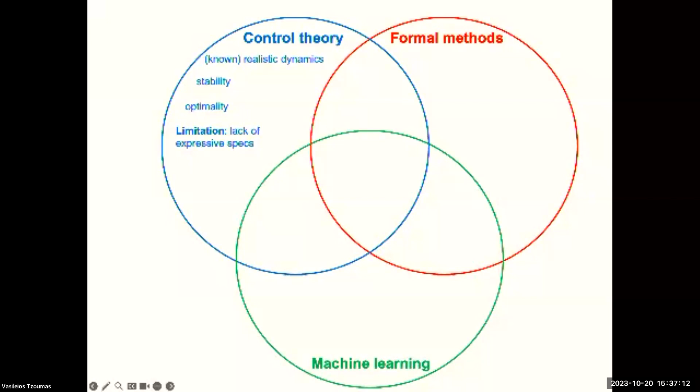However, in formal methods, we have expressive formal specification languages. In formal methods, which is an area in computer science, you can more or less formally express whatever you can say in plain English, in natural language. Here's a very simple example from robotics. Think of a very simple robotic environment where the environment is partitioned, and you have a robot that can move from some base, and it can gather data from some region. It has to avoid the dangerous region. It has two recharge stations. There are some intersections in there. I can literally write down a specification like that, and I can easily formalize it in some logic.

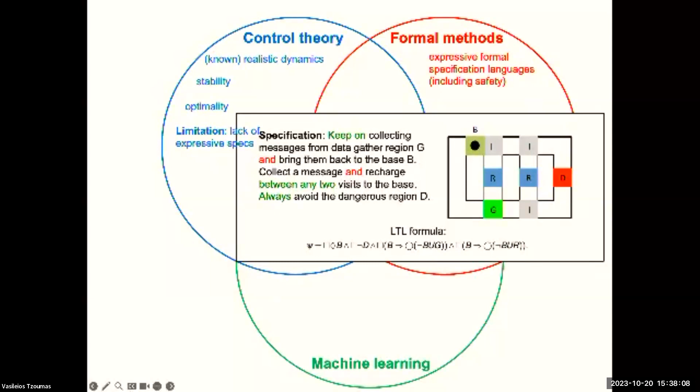This particular logic is called LTL, linear temporal logic. Most of you recognize here, I guess, the Boolean operators: conjunction, negation, implication. These weird symbols are temporal operators. So we can actually reason about how the truth value of statements change over time, right? So we have this rich specification language.

We also have algorithmic computational approaches for verification and synthesis. That particular logic that I showed you before, LTL, has the property that I can take a formula and generate an automaton which accepts exactly the language that satisfies the formula. Think of some FSA, or a more sophisticated one, like a Buchi automaton or Rabin automaton. And if this is your system, if you have a finite state system describing the behavior of some computer program, there is a well-defined notion of compositionality between these two. You can map a verification or synthesis problem for a very simple system like this, from a very rich specification, to some game on a graph. And this problem is very well understood. We had some discussion today that this problem is very well understood, but it's also extremely expensive. But at least we understand how to do this.

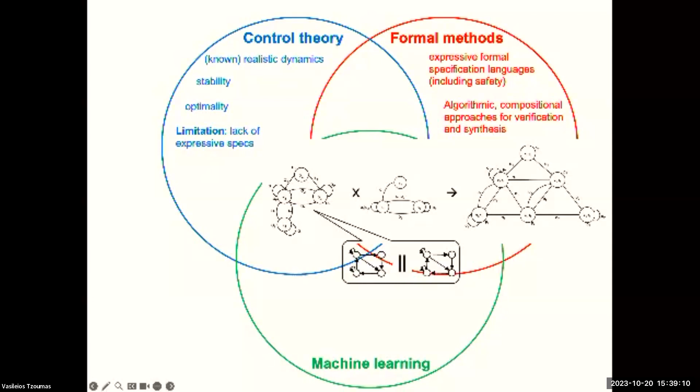And also, what we have in formal methods, we have formal ways of composing systems. So my plant doesn't necessarily have to be one system, but can be the composition of several agents interacting with each other. We know how to compose them. So that's what's nice about formal methods.

The limitation, again, traditionally at least, is that it was made to be interpreted over finite state systems. Think of writing down a mathematical model for a small computer program, right? Think of the states as being the value of the program counter, and then you can jump around, and you have a finite graph.

Machine learning, we all do machine learning. We all have to do machine learning right now, so you understand this area, right? In machine learning, the main strength is that we know how to deal with unknown, uncertain systems, data-driven systems. And I guess we agree that at least in classical machine learning, the main limitations are the lack of interpretability, the lack of correctness guarantees.

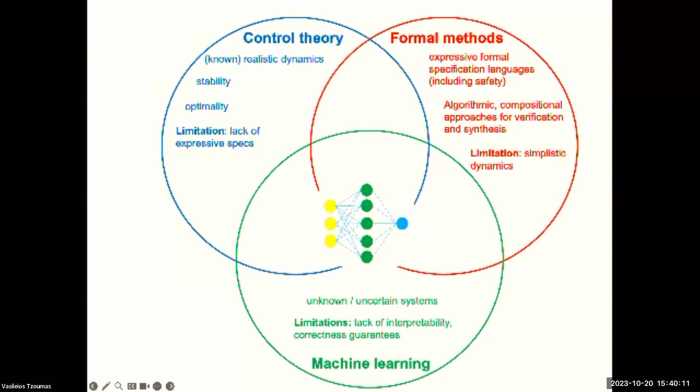Should we start a discussion on this or?

Okay. So the interesting things happen in the pairwise intersections. Like if I'm looking in between control theory and formal methods, I can talk about a problem which also received a lot of attention in the past, I don't know, maybe 15 years, like controlling dynamical systems from rich specs, right? So I'm taking the realistic dynamics that we use in control theory, and I'm using a specification from formal methods. Can I solve this problem?

Yes, and there's many approaches to solve this problem, so I don't want to go into that. I think the most popular one and the most intuitive is to take the system and discretize it. Cut it into pieces, construct some sort of a finite quotient, and then once I have a finite quotient, I know how to deal with this sort of rich specifications.

The intersection between control theory and machine learning, coming from the machine learning side, there's reinforcement learning, which I assume most of you are familiar with. I don't know much about my system, but I can apply actions, I can observe results, I can give rewards to those results, and based on those rewards, I can kind of learn about the environment, and I can actually develop a control policy at the same time.

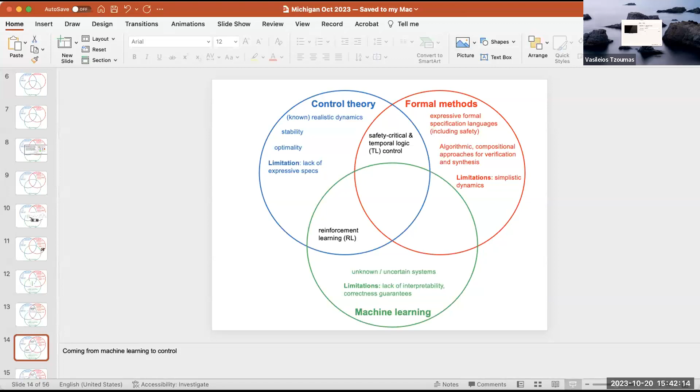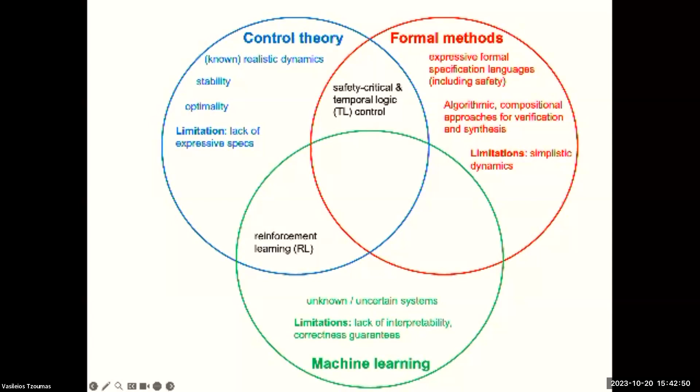Can you make sure the screen is sharing? We got someone on Zoom saying that it's not shared. Nishmi? Just get the new chair professor doing all this. Nice professorship that you got. She deserves one. Promote her to IT. It's the next step. I'm actually getting the wrong one on Zoom. Is that okay? I think that's okay. People on Zoom, can you guys hear me? Are you okay with looking at my presentation screen? That's the closed captioning. Can somebody ask them on Zoom if they're fine? No, it's good. Been knowing her since she was a grad student, actually. Yeah, Nishmi. Okay, good. So, all right.

So going from machine learning to control theory, we have reinforcement learning, which we're familiar with. Now, more from the control theory side, if you're in the traditional control theory realm, the closest you can get to machine learning would be adaptive control, right? So in adaptive control, you have some knowledge of your system, but not complete knowledge. The most traditional way to insert uncertainty into a control system in adaptive control is to assume that you have some unknown parameters acting along some known control directions, which you can capture in that matrix F.

And then you don't know the parameters, but somehow you want to get better and better estimates of the parameters, and construct a feedback controller which uses the measured state. So you assume you can measure the state and use the current estimate of the parameters to develop a control that you apply to the system. And the hope is that using this, you can stabilize the system. And also, ideally, you have the parameter estimates converging to the true values of the parameters, right? That's adaptive control.

The intersection between formal methods and machine learning. There is some work on verification of neural networks. I guess we're all familiar with neural networks. Some people try to see whether they can actually have some formal guarantees for those complicated systems. Temporal logic inference is something that I'm particularly interested in. Rather than just classifying data using some hyperplanes in some high dimensional space, we use classifiers that are actually interpretable because we can write them as temporal logic formulas.

So literally think of looking at some executions of the system, and let's say in the simplest case it can be offline supervised learning. So you have a set of bad trajectories and a set of good trajectories. I want to build a classifier that I can actually read and I can formalize. And if I can formalize it like that, you might also imagine that I can link it to my formal synthesis problem, formal verification problem. Like I'm looking at the environment, I learned something that I can express in a formula, and then I can compose that with my specification for my robot, and then develop a control strategy.

There's something that I'm going to come back to in this talk a little bit: I can maybe use these types of specs to make reinforcement learning a little bit better. And I'm going to come back to this. For example, I want to teach a robot how to drive a stick shift, right? So I want to tell the robot, okay, you've got to push the clutch in first. Europeans understand, I'm not sure about the other people, but there is a clutch. Push the clutch and then engage. So you have to tell them clutch first, then engage, then gas, right? So I can put that in a specification like that. So when the robot goes into the car, it already knows that it shouldn't try to push the gas if the engine is not engaged.

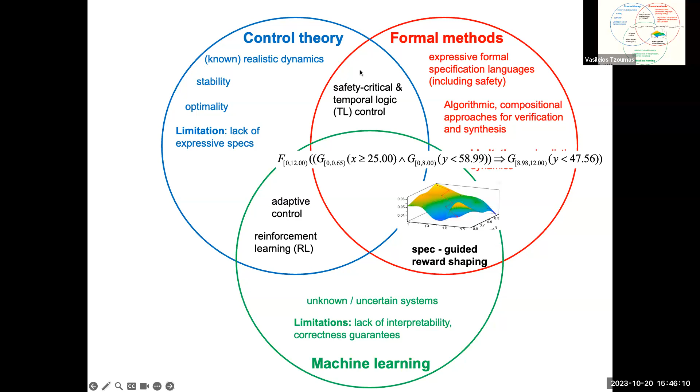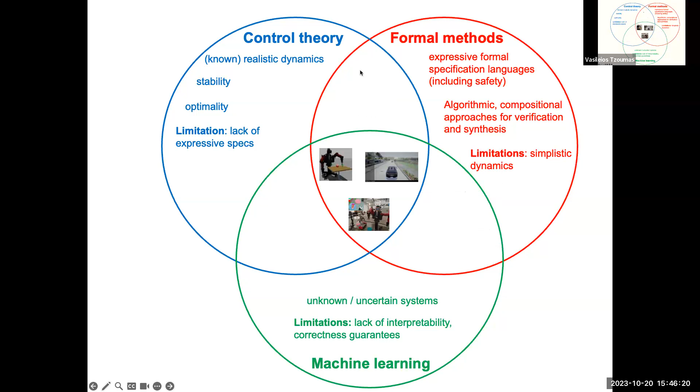Okay, so I'm going to have 3 motivating examples in this talk. 2 are from manipulation, 1 is from autonomous driving. And again, please feel free to stop me anytime so we can discuss.

So the way I organize this talk, I'm going to start from the control theory world and go into the machine learning world. So I'm going to first assume that I have perfectly known dynamics, and then I'm going to assume that there are some unknown parameters in my dynamics. Then I'm going to assume that I have some knowledge about how the model should look, but I don't really know the model. And at the end, this is fully blown machine learning where I don't know anything about the system. Can I still have some sort of formal guarantees?

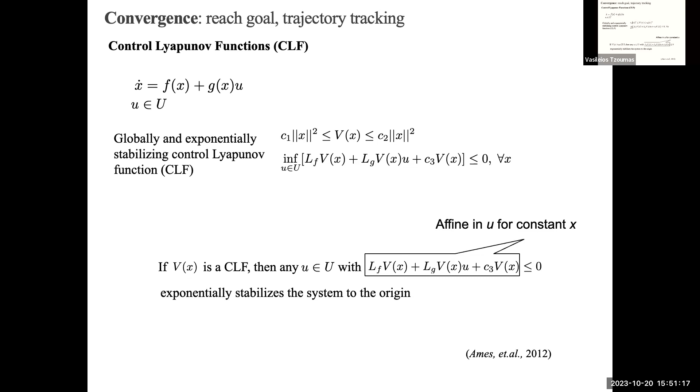And the answer is yes, we have such a sufficient condition, and it's based on the notion of a control Lyapunov function. That's the definition for a control Lyapunov function. If I have something like that, then any controller U that satisfies the control bounds and this inequality is going to ensure that I have global exponential convergence to the origin. And the most important observation on this slide is that if I keep the state x constant, this becomes something that is linear, or affine, in control. Good. So let's remember that.

Something very similar for safety, same type of system, control bounds. Safety here is defined as the forward invariance of some set. So safety means staying inside the set, described by a differentiable function B. A sufficient condition for safety is that I can find a controller U that satisfies the control bound and this inequality. By the way, these are Lie derivatives. I guess you guys know that, right? I have a scalar function. I want to see how the value changes along the vector field. I take the dot product between the gradient and the vector field, right?

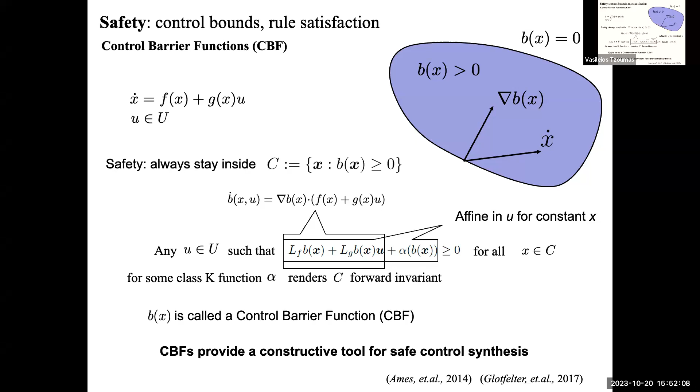Okay, and again, what I want you to remember from here is that if I keep the state x constant and I want to solve for the control, this is linear in U, right? So it's just a linear inequality in U. Okay, so I want to put these two problems together. I want to now control that system. It has control bounds. I want to minimize energy. I want to achieve safety and convergence. Based on what I showed you so far, I can map this problem to a nonlinear optimization like this. I want to minimize this cost subject to all these constraints: the dynamics, the input control constraints, this one ensures convergence, this one ensures safety.

That's a hard problem, yes? This looks like a stabilization problem instead of a reference tracking, right? Yeah, but again, remember I said, let's assume that my trajectory tracking is solved by converging from one waypoint to another. So I'm making this assumption, yeah. It's not the same as the top. It's more conservative, right? Safety. Right. These are all sufficient conditions, right? It is conservative.

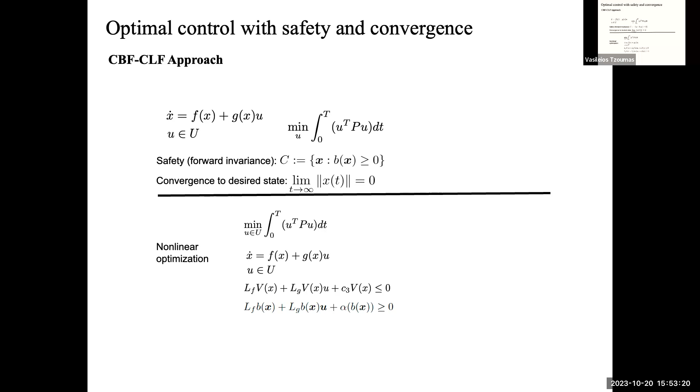Okay. Good. And it's also bad, right? Solving this, I don't think it's good news. But again, some people thought about it and they came up with a very computationally efficient algorithmic approach to this. And it's going to exploit those two observations that I made before. Remember the two linearity observations.

So rather than solving one big optimization problem globally from 0 to t, from beginning to the end, I'm going to take the time interval that I'm interested in, 0 to t, cut it into pieces, let's say uniform pieces for now. And then I'm going to solve this problem in each interval. So let's say at time 0, I have the initial state, I'm going to keep it constant. If I keep that state constant, then this is going to become a linear inequality in U.

Linear inequality in U, I'm going to assume that U is polyhedral. So far, all these three are linear constraints. Good. And then I'm going to minimize this, right? So I have a quadratic cost, linear constraints. That's very good news. It's a QP.

I'm going to solve the QP. I'm going to find the solution U. I'm going to apply it at time 0. I'm going to keep it constant. I'm going to integrate my dynamics forward in time. And I'm going to end up at the next state. And I'm going to reiterate. Right? So if I do this, I'm going to replace one global ugly optimization problem with a bunch of very myopic QPs.

The second version is kind of a greedy, actually greedy policy for your general optimization problem. Is there any divergence, possible convergence guarantees between the big program and the smaller ones? So I can have a long answer and a short answer. Short answer is no. It was designed to be like this, and we have people actually who understand this problem very well. It was designed to be computational, right?

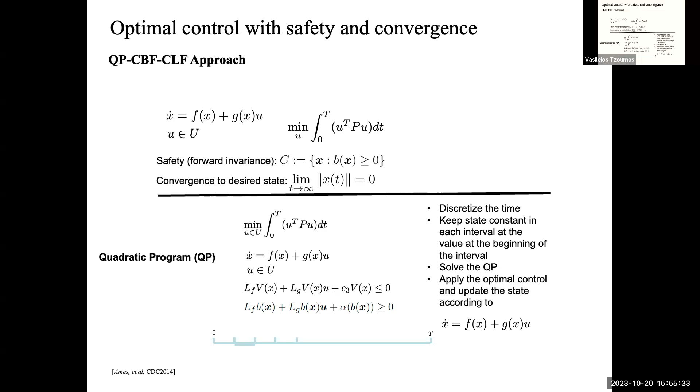But if you cut it into very small pieces and you put it into, I guess, bipedal walking first, it works. But it's obviously conservative, right? So you basically lose convergence, lose safety. Theoretically, you don't have those guarantees anymore. But you hope that if everything is well behaved, it's going to work. Okay.

All right. So I'm just very briefly going to show some work from my group on how to address limitations of this original approach. So in the original approach, the way it was designed, it only worked for, I would say, a system with relative degree 1, right? So this relative degree, I can illustrate it through this very simple example. So assume that I have a one-dimensional unicycle.

So think of this being ego is supposed to follow some preceding car. And the dynamics are given there, and the safety constraint means maintaining a minimum distance of delta between the preceding vehicle and ego. So that's safety, right? So you're gonna formulate a function which captures that. So that's gonna be this B function. So I'm gonna require this to be always positive.

So if I go to this equation and write it down for this particular case, if you're familiar with input-output linearization, this problem happens a lot, right? What's going to happen is that when I compute this derivative, the control is going to disappear, so that sufficient condition becomes useless, right? So how do you deal with this?

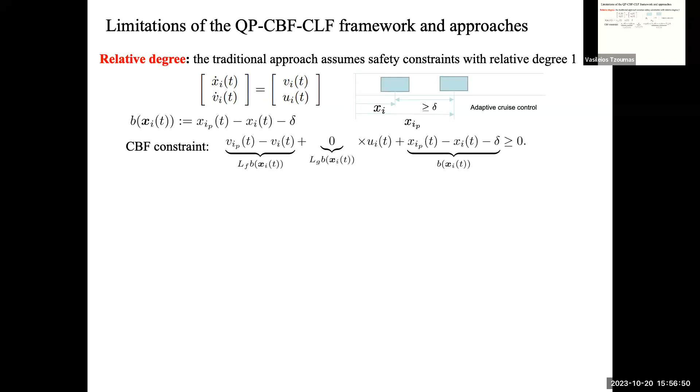So that's something that we've been looking at with one of my students, and it turns out that if you have a relative degree m, which means you have to take m derivatives, in the input-output linearization jargon, of the output function until you actually see the input, if you iteratively define m CBF type functions like this, then you can come up with a sufficient condition very similar to what you had before, which looks a little bit more complicated. It's a bit more conservative, and the guarantee is a little bit stronger, right?

So think of each of these functions defining a set like before, and this C1 is the original set that you're interested in because psi 0 is actually the B function that you used to formulate your original safety problem. So you can ensure the forward invariance of the intersection of these sets, and implicitly of this one that you're interested in, if you satisfy this condition, right? And it looks a bit more complicated. I'm even omitting something here which looks ugly, but you can find it in papers.

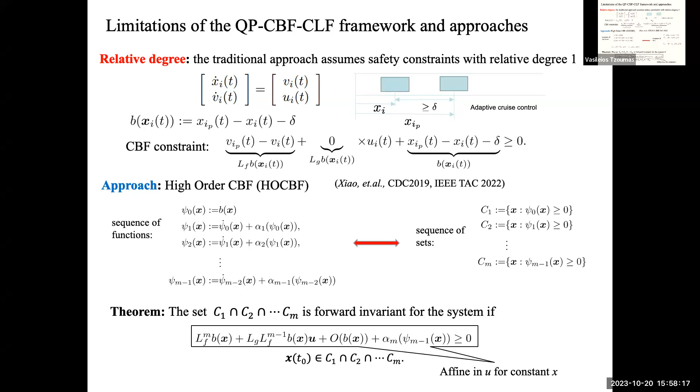But again, the good news is that computational-wise it is the same problem as before, in the sense that if you keep the state x constant here, you still have one linear inequality in U. You can still chop your time interval, and you can still solve a bunch of QPs to solve the problem from before. Again, I'm going quickly through this. Some of you here are experts on this, it's just like a refresher.

A more interesting problem is feasibility, right? And those of you familiar with this technique, you always run into this. So remember, initially I have one global optimization problem. If I had like a very strong computer, I would solve that, but I don't, right?

This approach in which you cut it into pieces and solve QPs is very myopic. So think of, if you're here somewhere and the state is fixed, then you solve your QP, which is very fast. It gives you a control. You apply the control, literally just apply that control, and you're kind of not seeing anything, and the system is going to evolve to the next state.

When you get to the next state, it is possible that if you plug this new state into the constraints, you end up with an empty set, right? That state does not satisfy the constraints, and in practice that happens because of control limitations, right? You get into a state and you don't have enough braking power to actually get there.

And by the way, the constraint at the top, which is stability, most of the time we relax, we slack it. In our autonomous driving problem, if I don't go precisely to my waypoint, it's okay if I'm just close to it, right? It's still going to be okay. The way to do that, I'm showing here, but there is a delta there instead of the 0 at the top and some delta squared in the cost. So that's usually not a problem with the feasibility, but safety and control constraints are problems.

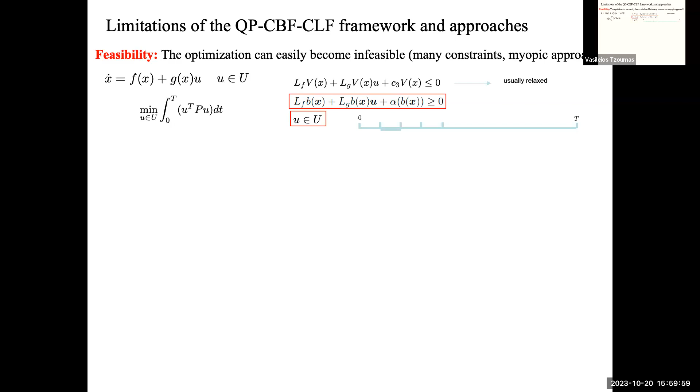And there's many ways you can deal with this, from different groups, different approaches. I'm obviously very biased here on my own work. So one way is to actually exploit the structure that we just introduced for high order control barrier functions. The constraint that we have here was that this whole term here is a class K function, which is a pretty large class. And then we can introduce extra degrees of freedom in our problem. We can put some penalties in here or weights, and then we can design dynamics for it.

So basically we're introducing degrees of freedom, extra dynamics, but some extra constraints, which again will be extra CBF constraints. So the optimization problem becomes significantly larger, but you can show that it becomes significantly more feasible because of the extra degrees of freedom that you have.

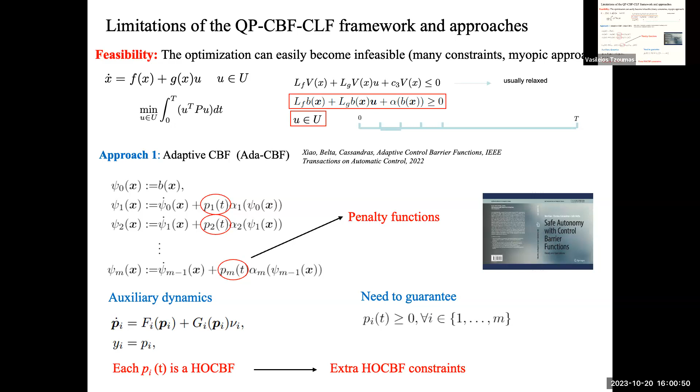Another way, which is actually very intuitive, is to kind of learn feasibility, right? So think of your robotic application and you move in a cluttered environment. There's many, many obstacles. And let's say that you have some time to do some computation before you deploy your robot. So one thing you can do, you can go close to the obstacles where most probably you're going to become infeasible when you solve your problem, and sample. So let's say that you generate many, many samples around your obstacles.

And then for each sample, you can plug it into the set of constraints and see whether that's feasible or not. If it's feasible, you label it as feasible. If it's not feasible, label it as infeasible. And you had 10,000 of them. And then you can build a classifier which separates feasible from infeasible, and make sure the classifier is differentiable, right?

So then I'm going to introduce an extra constraint in my problem, which is going to say that that classifier is positive, for example. So I'm adding a constraint in my original problem, which makes sure that I'm never going to get into these infeasible states, right? It's very ad hoc and very heuristic, but it shows to work.

And actually, we have a paper which shows that it works, and it has some nice invariance properties too. For example, if you look in a sphere world where you have sphere obstacles, it can be actually very, very cluttered. And you can just solve one optimization problem and then just keep on translating the solution everywhere. I cannot see my, okay. So you can literally move in very, very cluttered environments, which for those of you working with CBF, CLF, is actually kind of good because in situations like this, you usually lose feasibility.

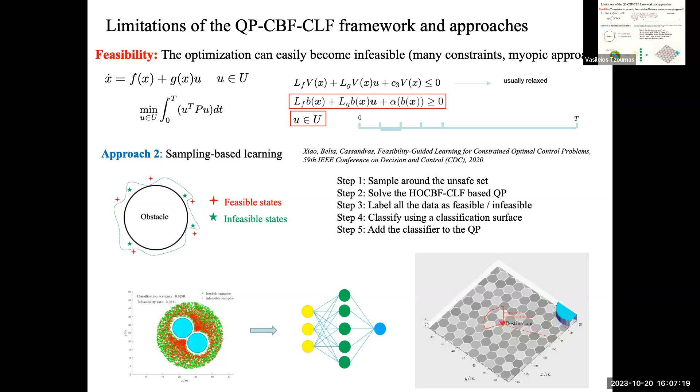What I'm showing here is a sequence of QPs that you solve very fast to ensure stability and convergence. Can I do exactly the same, have a sequence of QPs that ensure stability and safety in this case? It's a longer story, but the answer is yes. You have to spend a little more, you actually have to do more computation.

I'm just showing you here kind of what the algorithm does. Remember, in the original version, you cut your interval into pieces, keep some state constant, solve the QP, apply it, integrate one system of differential equations, go forward. In this case, you have to define an extended version of the CBF and an extended version of the CLF, and this is what you do at every iteration. Every QP becomes significantly larger, but provably correct. I'm not going to show details, but if you want, just stare at this a little bit.

So again, for the quadratic program, the condition for stability is at the top, and right below is the condition for safety. We discretize the time again. We start with some initial state, start with some estimate for the parameters, and then solve the QP there. This is the whole thing.

You have to maintain an estimate for the parameter. I think I'm going a bit too fast, I forgot to say something. This is more like what people do in adaptive control: you take a measurement of your state at every time step. So the question is, if I take that measurement of my state, since I know the structure of my dynamics, I can get some information about the parameter at every time step. That's shown here.

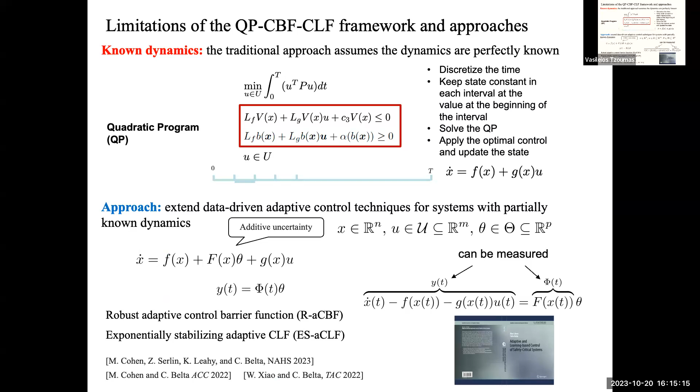Another good question — so you've got a theta that is a fixed number in your dynamics there. Why do we need two different thetas when we go to CLFs and CBFs? Because of the conditions that we need to satisfy to ensure safety and...

And once you get to the true value of theta, you should be able to use the same theta to compute — no, but I have to, this is how I'm integrating my state, right? And in order to ensure safety, so by using CLF and CBF to ensure stability and safety, we use different — we need different equations for theta hat in order to show the proofs work. Both equations, though, converge to the same value.

So does that mean as long as it becomes full rank, then you don't have to collect more data? No, you still have to collect more data. If it loses rank, the method fails. But as long as you've already made sure this... no, you still have to.

So staying full rank is fine, but you keep on adding information to a full rank matrix, and this still evolves in time. It's not like you're solving a one-time inversion where if it's full rank I can invert and get a unique solution. I have to keep on adding data from the stack to this, and this still changes in time.

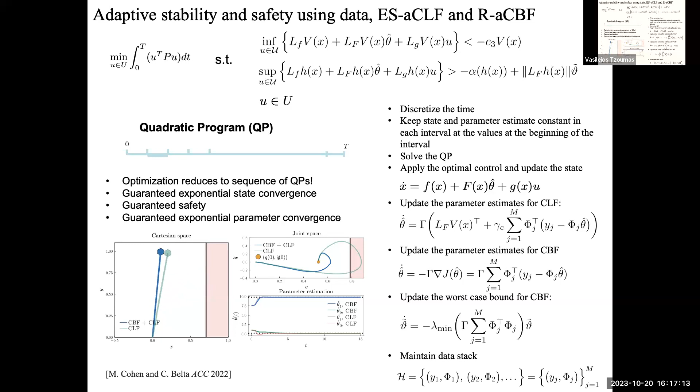I think this has something to do with the persistence of excitation, like the lambda means something, if I remember well. Yeah. All right, and we can make things more sophisticated with the law of conservatism, but very intuitively.

So now let's say that I want to extend CBF/CLF to full LTL. Is that doable? Yeah, but conceptually, so let's say that you have a formula which says that you have two regions, O1 and O2, and you want to visit them infinitely often and always avoid this one, right? So that's an LTL formula.

I told you that every LTL formula translates to some sort of an automaton. So basically, the sequences of O1, O2, O3s, these are infinite sequences in time. The infinitely many sequences that satisfy this formula are the same sequences that are accepted by this automaton. And remember, automata have acceptance conditions. I have to visit a set of final states infinitely often. So this is how the automaton looks.

So now really the question is, how can I enforce that my system produces executions that are accepted by this automaton, right? So basically, I just want to make sure that my system generates symbol O1 and then never generates symbol O3 and so on. So if I want to generate symbol O1, which means that I'm visiting region O1, I'm going to solve a CBF-CLF problem where I have a CLF function that takes me to region O1. So the CLF is for convergence here.

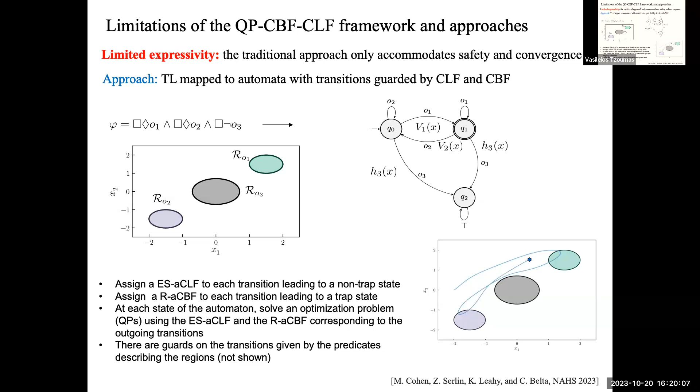Questions on this? Again, very conceptual, right? CLFs take me to places, CBFs keep me away from places, which means that I can enforce taking transitions versus not taking transitions in an automaton, and automata give me the richness of a temporal logic.

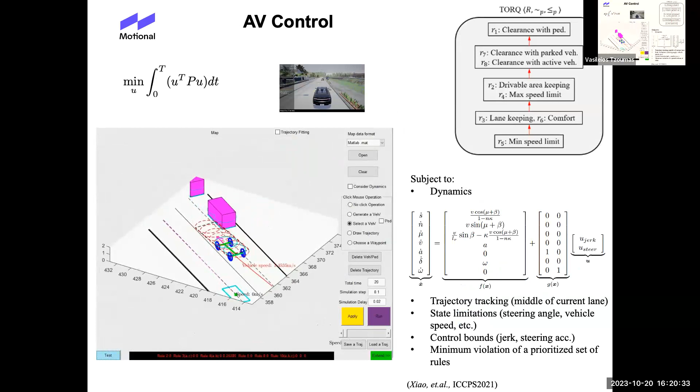All right, so let's go back to my motivating problem. Remember, I want the car to follow a set of waypoints, and I'm going to use CLFs for that, and then I want to satisfy a prioritized set of rules. Each rule is going to be a CBF. And how am I going to deal with the priorities?

So the simplest approach, and that's exactly what we did in here, was to have a very greedy approach. So I'm going to try to see if I can satisfy all the rules from the priority list, right? And that's going to give me a bunch of safety constraints. Try to solve the problem. If I cannot, then I'm going to have to start relaxing constraints, because I want to have some sort of a global minimization of the set of rules.

And obviously, if I cannot satisfy all the rules, then I'm going to try to start to relax rules that are not that important. Like, for example, satisfying the minimum speed limit is not that important. So I'm going to allow that to be violated. How we do this formally, we slack the corresponding constraint.

Right, so here, at some iteration I have some rules which are relaxed. So I put a delta i in there, and then I penalize it at the top. Good. And also, as I said, the convergence to every waypoint, the CLFs, are always slacked too. So I don't have extra constraints giving me feasibility problems.

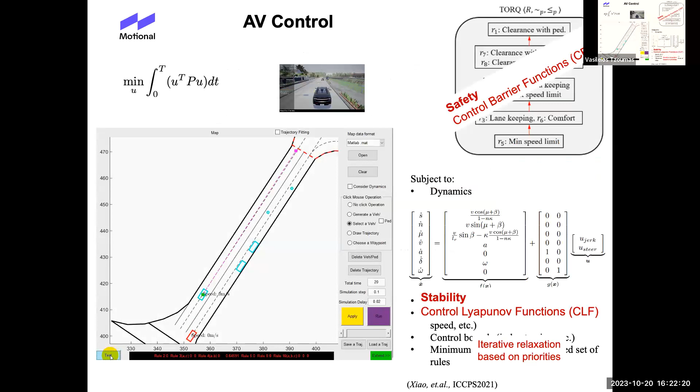That's kind of it. Make sense? You have a predefined set of priorities. Yeah, and there's also discussions we can have in here. Ours is a total order, so it's kind of very easy; if you have some priorities which are like partial orders, those are harder. We have some results on that, but I think intuitively this is enough. So there's a total order.

And these are the kind of results you can end up with, right? So for example, here's a scenario in which you have the ego here, and then an active vehicle that moves this way, 2 parked vehicles here, 2 pedestrians. I want to solve the problem, right? So what happens again, we try to satisfy everything, we cannot, and then we relax starting from here, and we end up with a solution that looks like that.

So what I'm showing in there is that the blue portion of the trajectory violates one of the rules, which happens to be R5, which happens to be the lowest priority one. So apparently I have to slow down under the speed limit to be able to satisfy the set of rules, which might be a bit unintuitive, but this is because

the way we do collision avoidance, we put a bounding box around ego, and the size of the bounding box depends on the velocity, right? So the faster I move, the longer the bounding box is to make sure I'm safe. So apparently I have to move very, very slowly at some point to make sure the bounding box is small, so I have enough space to go in between pedestrians and stopped cars and so on, right? So that's why that's violated. And again, that's all done automatically.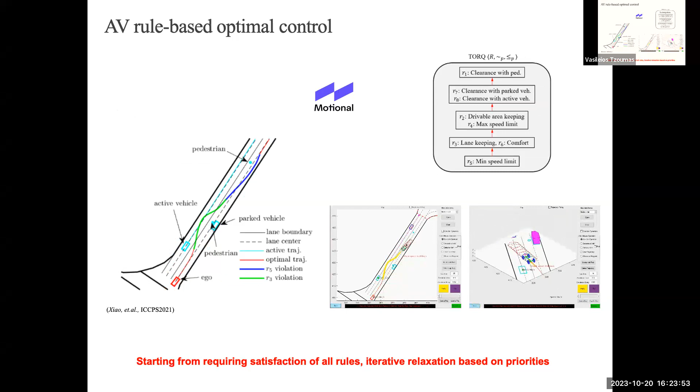And I can have more complicated situations. So look at this one, for example, when I have to do this kind of maneuvering. So obviously here I have to violate more. So we violate lane keeping too. I have to get out of the lane, right? And I'm showing portions in which I violate different types of rules. But again, globally, I'm minimizing violation.

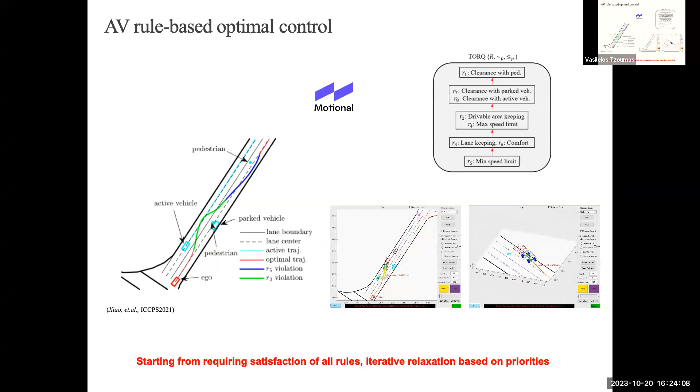All right, that's half of the talk. So very briefly, I just want to show you some, again, we're going towards more machine learning approaches. So here's the problem that we looked at. Some of you might recognize Baxter in here. This is actually a simulation environment.

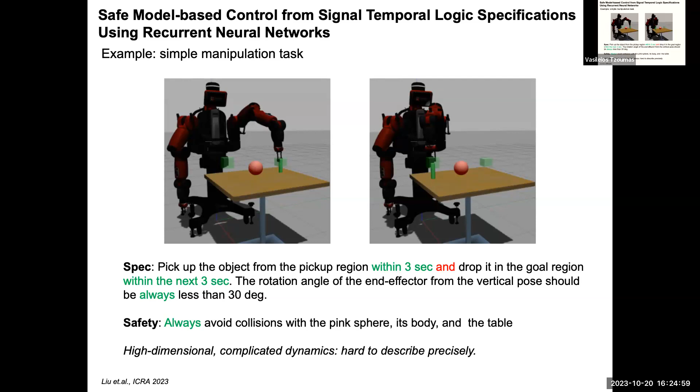And I have the task of grabbing a box from one place, putting it to another place, and avoiding some dangerous region. And the specification, again, is rich as before. Different type of richness, so you can see that now I actually have concrete time constraints, like I want to do things within certain deadlines. Right, so given the time is short, I'll just give you a very, very high level overview.

So we assume that the dynamics are of the type F plus G of X U, which we know every single manipulator satisfies. And then what we do, we start learning. So we learn F, we learn G, and then we learn control policies given the model that we learned at a particular iteration. So literally what we do, we just start moving the robot around a little bit.

Okay. The most important thing is that the logic that we have here has something called quantitative semantics. So that's STL for those of you familiar with this. This logic has the property that once I have an execution, I can actually quantify how far that is from satisfaction. So I have a number which tells me how well I'm satisfying. And I'm going to call that measure of satisfaction rho.

That's called robustness. Okay, so what I'm doing here, I'm going to start to move the robot around a little bit. I'm going to get a very preliminary model, like some estimates for the drift and for the control directions. And for that, again, we're using neural networks for each of them.

It's like FNNs here. What we do, we minimize the error between the measurement and the predictions of the very preliminary model that we have, right? So we have some very preliminary model. For that model, we learn a policy. How do we learn the policy? We're doing it by maximizing satisfaction of the spec, right?

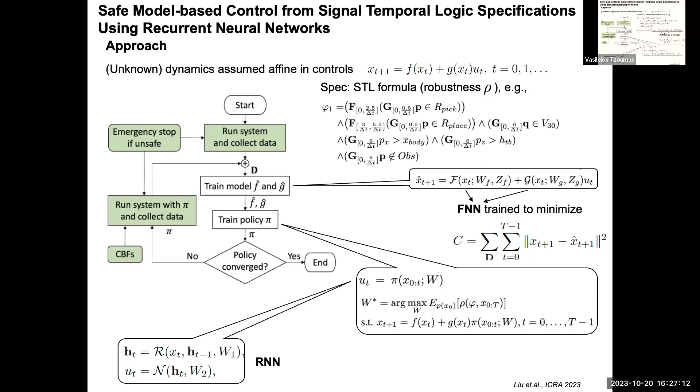Again, some of you are familiar with that. If you don't know, I can tell you more on the side.

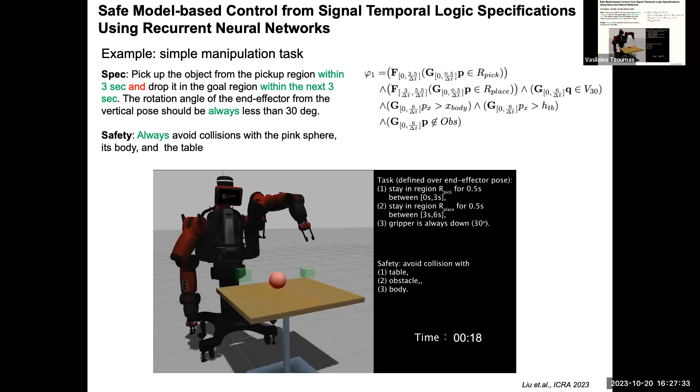But what's really cool in here is that we were actually very surprised how fast we can learn with this approach. Literally, we did like 5 cycles and in 14 seconds, learned the perfect policy. All right, but again, there's no proof. So we published this in ICRA, it looks very good. Intuitively, it makes sense, but,

and maybe just one more idea. I have 1 minute. So this is way more complicated, right? So we have this framework in which we wanted to cook, right? So we have 2 robots, Jaco and Baxter. This is a real experiment. They're making hot dogs, which is a complicated task.

So the question is, can you specify, tell the server what to do, tell the cook what to do, specify a lot of general knowledge, like for example, don't grab the hot dog if it's not cooked, or you cannot grab the hot dog if the gripper is closed. These kinds of things, tell the system as much as you can before it starts doing brute force reinforcement learning. Does that help?

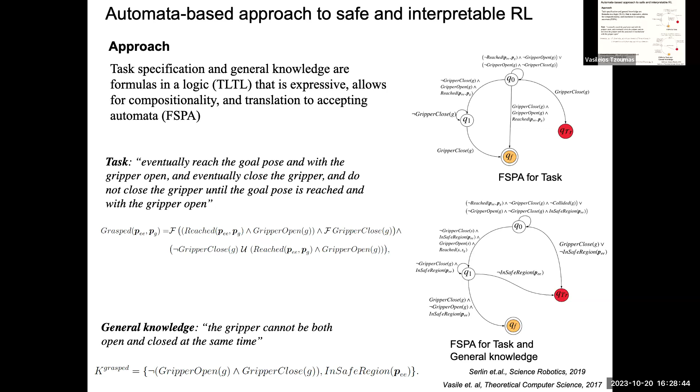And again, we use another logic, but again, a logic which accepts automata. So we can have a bunch of specs and a bunch of general knowledge. There is a way to write them down formally and automatically generate automata. And the automata can be composed together. And then for those types of automata, we can also define a degree of satisfaction, which depends on how we satisfy some predicates, like closeness to things, but also how far we are from reaching a final state, which means how far we are from actually accomplishing the task.

So the degree of satisfaction is like the reward that you would give in reinforcement learning? Exactly. That's what we use to shape the reward for reinforcement learning, which is different from before. Before we had something way more structured, the robustness of a logic. Here, when you move in this automaton, you have an idea of how far you are from a final state, but also you have some predicates in here for which you can measure how well you're satisfying them. If you look in the paper, there is a technical part which explains this.

But again, long story short is that you can put a lot of information at the top, specifications and general knowledge, generate a big automaton, start doing reinforcement learning in here. And as Mika said, we use this to actually shape the rewards in reinforcement learning. And then what happens in here is that

there's another trick in here: the reinforcement learning actions that you get from this messy learner, you can also project them to a safe set by solving an optimization problem. You want to be as close as possible to the output from the RL while generating a control that's safe, in the sense of what we did with the CBF. With the CBF you have a bunch of constraints and you solve an optimization problem, which happens to be a QP. So you can always do a projection at the end to stay safe, deviating a little bit from the RL, so learning might not be as good, but it ensures safety. So I guess that's all I wanted to show you.

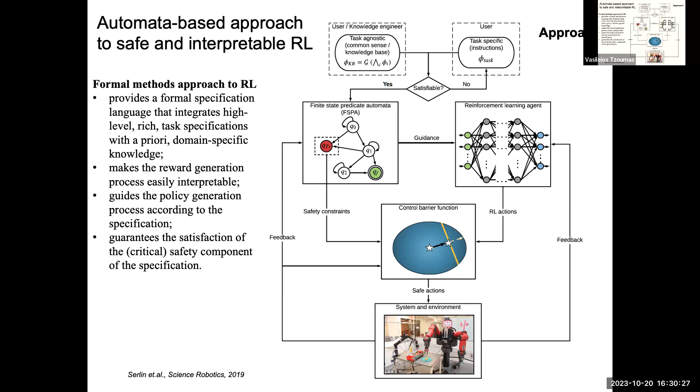Anyway, we can look at the movies. I would rather show the people who did the work. Only one is in my group anymore. This guy is going to be on the market soon. And these are the movies. That's the last slide. I'm done.